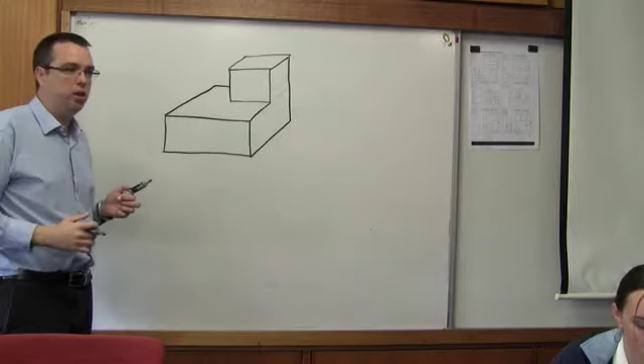Okay. So when you draw with your 0.5 mechanical pencil, make sure that you press down, you hold the pencil pretty well perpendicular to the paper, so that way you're getting the full width of the lead, rather than if you hold it at an angle, you're gonna get a beveled line. Okay, so that's the first one. That one I did pretty quickly. Again, it doesn't need to be perfect because we're freehand sketching. So I'm going to do the second one now.

The second one, remember that the even numbers are supposed to be drawn in isometric. So, what I'm going to start off with in isometric is I always start off with the crow's foot. So that's my crow's foot, that's my 30-30, and I'm looking at, well, where am I going to start? I'm going to start in this corner, that's where I've been told to start. So I have a block that's 20 mil wide, 20 mil high, and it's 40 minus 16, so it's 24 back, right? So it's 20, 20, and 24 back.

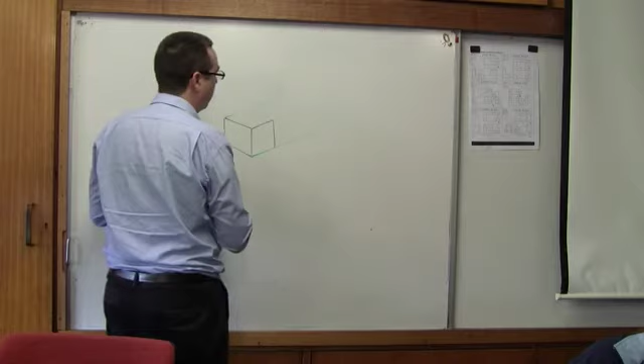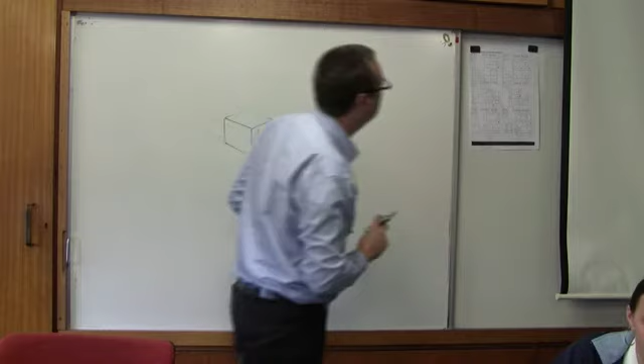Now, this is where you should use construction lines, because there I drew that one too long. Okay, so then I can measure the whole width of this thing is 98. So 98 mil for the whole thing. And once I've measured 98, I could then go back 20. So it gives me this mark here. Does that look about right? Maybe a little bit higher. Is that the top? Okay.

I'm drawing my lines vertically up. Now I'm going to draw, using my set square, a 30 mil line across. I'm measuring 20 mil up here, drawing across, using the set square again here, set square again here, measuring back 24, going across. Well, that looks a little bit bigger this time. I'm going to adjust that just to make sure. This line here, I should be able to draw all the way across. So, that'll do. I'm going to run out of space for this drawing.

I can see 24, and then the rest of the object.

Excuse me, people, I'm recording. Please don't talk.

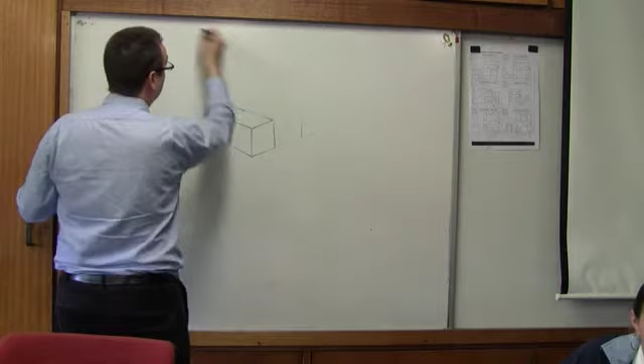I don't want to send people out, but I will.

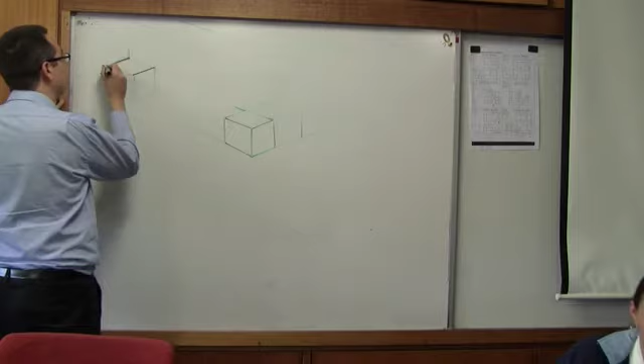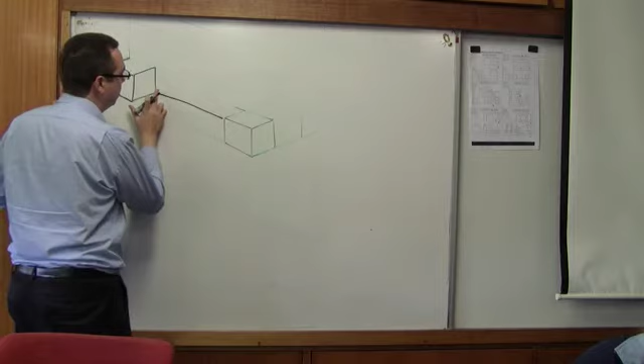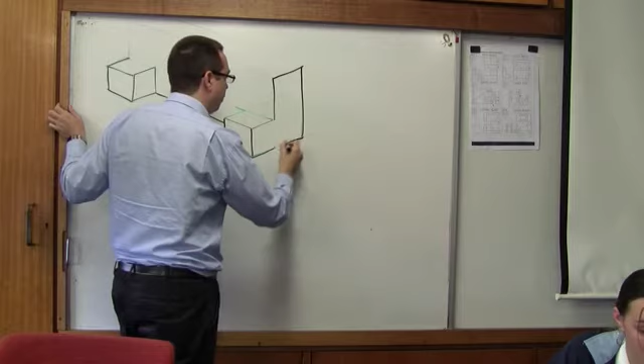Okay, now that I've got my construction lines drawn, I can now start going over this in more detail. That might come because of the height. I think that'll come there. Again, I'm drawing this freehand. You're supposed to be drawing this freehand as well. Now, that line shouldn't be there. I made a mistake with that one. Now, you don't rub out construction lines, but if you make an error with your thick dark lines, you do have to erase those.

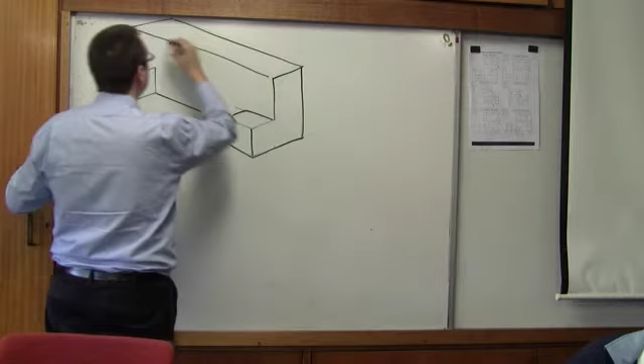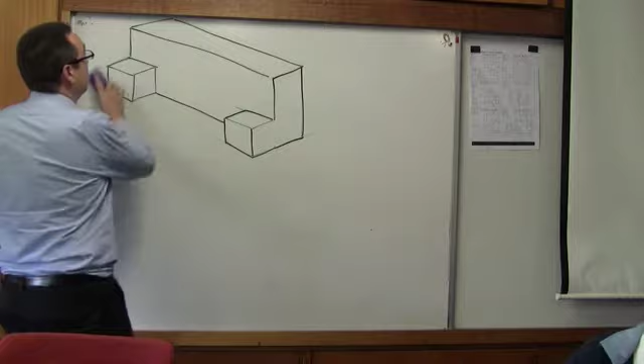Okay, so the second object should look something like that. Something like that. Okay, we're going to go to the third object. The third object is again drawn in oblique, and I can see why I have chosen this one to be oblique, because we've got a very easy front view, and there's not really much else happening that's interesting.

So it's 20. That's 50. And so that's the front view. I've just basically redrawn that front view, and then I just need to draw it back. The width of the object isn't given, but I'm going to say it's 20.

This one is not supposed to be an isometric. No, not that one I'm talking about. Yeah, these are supposed to be in oblique. So oblique's pretty easy to draw. You just go back at 45 degrees. So something like that, and it's hard for me to get this angle right with no freehand. You're allowed to use drawing implements.

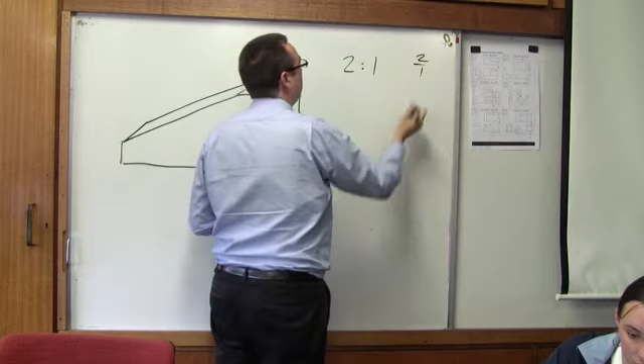So if this was worth 3 marks, which it could be, I'd be looking to see that you got the overall shape and dimensions correct, which is a good place to talk about scale. If the scale says 2:1, that means it should be twice as big, the same as 2/1. If it says 1:2, it means it should be half the size. So based on the dimensions shown on the picture, you should draw your object. If it says 2:1, twice as big. If it says 1:2, it should be half as big.

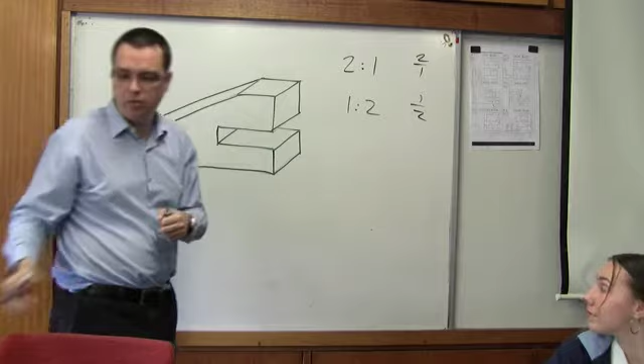So generally, for 3 marks, let's say I drew this shape, right? Let's say I just did that. I'd give that 1 mark. I'd say, well, conceptually you've shown me that it's very, very roughly the right shape, and you at least understand what an oblique drawing is supposed to look like. So you've done that, but you've left out detail, and the quality.

So even if you then included this missing detail, this and this, I'm still only giving that 2. And the reason for that is there's freehand and freehand. Now, I think that freehand's pretty good, right? If I was drawing that for a client, they would know what I was talking about. But it's not even close to being the right dimensions. There hasn't been a legitimate attempt to try and draw this in the right way. So that's what I'm looking at for 3 marks.

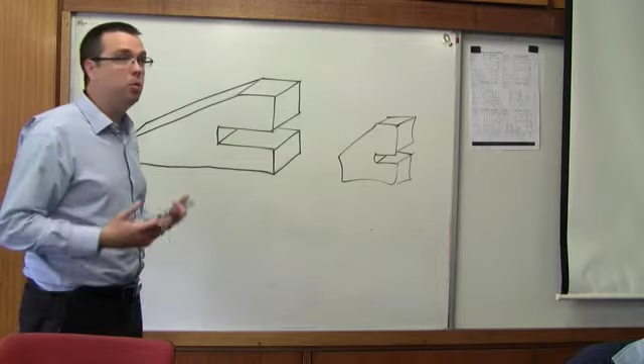It doesn't need to be perfect. The whole idea of freehand means it doesn't need to be perfect, but there's 1 mark for the general shape, 1 mark for knowing the right method of drawing, and then another mark for including details. So leaving those details out would cost you the mark.

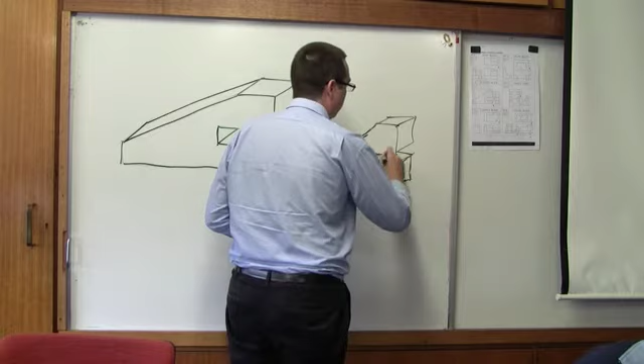I'll also point out that I do not like feathering, right? I just spoke to a student about this today. Don't do this, right? This is called feathering, and it's not acceptable in technical drawing. Don't do that. That is bad. Don't do that. Bad. Don't like that.

Okay. On to drawing number 4. So my front view that I'm looking at. Actually, because we're doing isometric, it doesn't matter. I'm going to start a little bit lower. I got into trouble starting too high earlier, so I'm going to start a little bit lower down here. So I've got my crow's foot, and I'm drawing something that's 80 and 15 up. So, yeah, I guess we'll call that 15.

Call that 80. 15. So it goes in 5. In 5. We go across another 15. We're going up. Does it show the height of those objects? No. Because I don't have the height of the object, I'm just going to draw it. I'm going to measure off the drawing, assume the drawing that I've provided is to scale. Take a reasonable assumption. Again, we're doing this freehand, so it doesn't really matter.

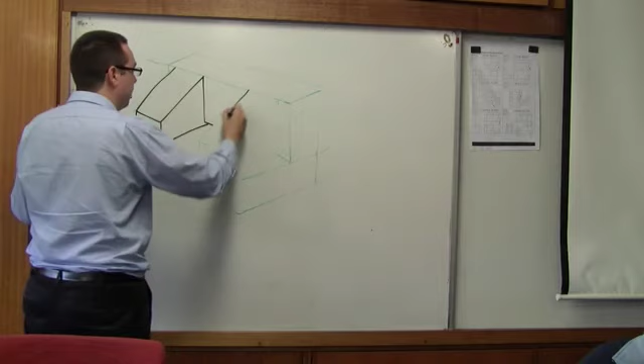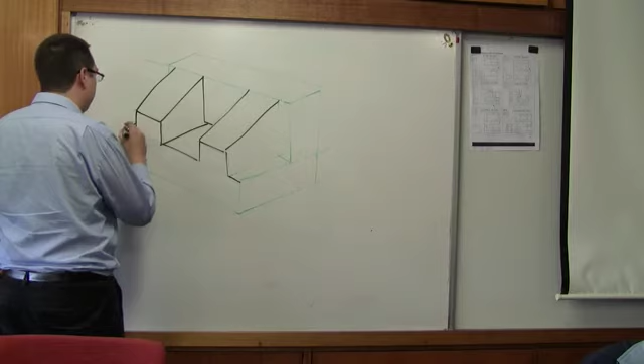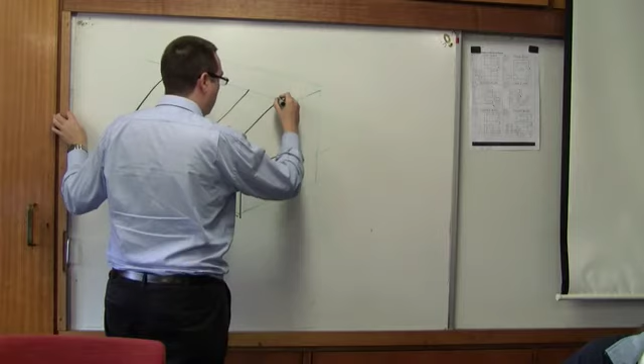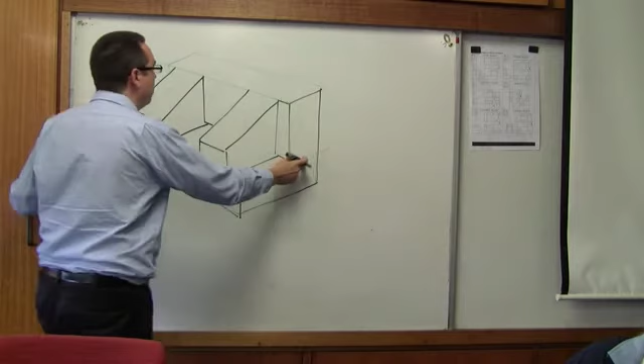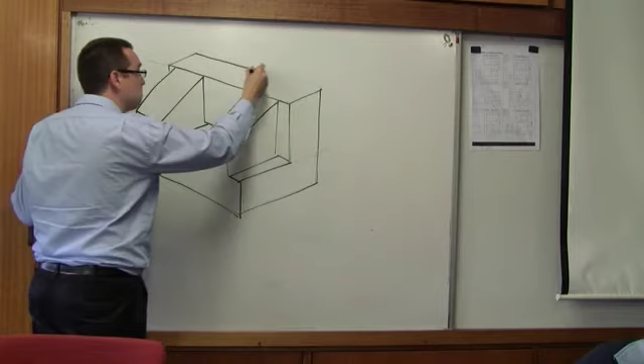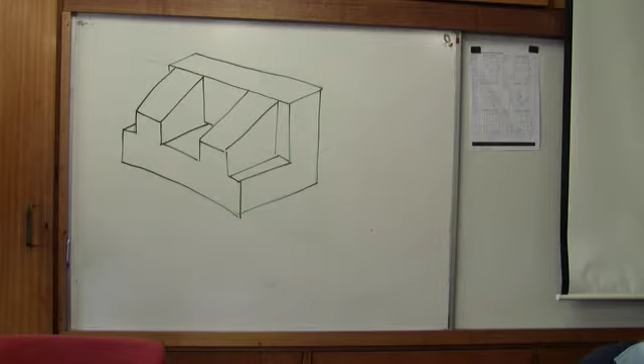That's it. Now you'll notice there that I'm not erasing that line. That line can stay because it's a construction line. And now there's a bit of a curve in this line here. I'm not concerned about that, right? If we're talking about freehand drawings, which is what we're doing here, I can accept that line. What I'm looking at is the general shape is correct. The dimensions are generally correct, it's proportionally correct, as long as it's roughly to the right scale.

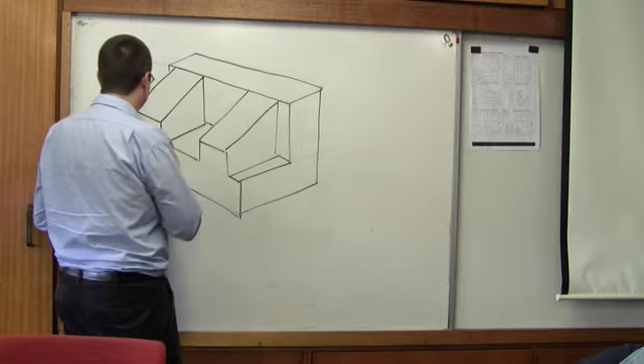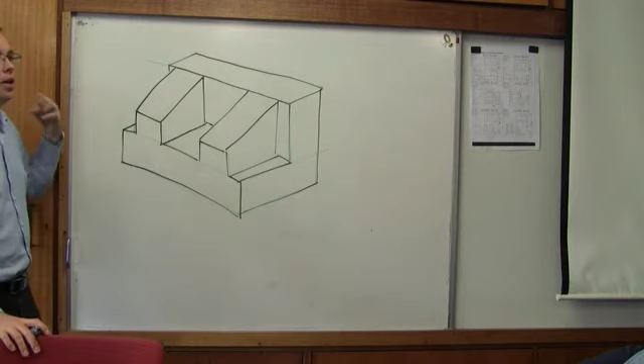I'm drawing at an enormous scale because I'm drawing on a whiteboard, doesn't matter. My angles are mostly correct. Even if they're not perfect, at least I can tell looking at this that it's an isometric drawing. And then I'm looking for things like, have I forgotten this detail? This detail here is where people would commonly make mistakes. Making sure that this line here is not dark, but these lines are dark. That can be conceptually difficult to evaluate, but the idea is here there's no bend, whereas here there's a bend. So there is a bend where you would see a line.

Okay, we'll move on to question 5. So the first thing I'm looking at is what does the front of my object look like? This is actually interesting because the picture is cut off, it's quite difficult to figure out exactly what's going on here. From that side, there's a line here, which I'm not sure what's going on there. It looks like it's coming out at 90 degrees, so I'm almost concerned there's a line that shouldn't be there. Maybe the width of that whole object is not 50, so that's what I'm going to assume.

Okay, so I'm going to start off by drawing this first rectangle. This rectangle is 50, 56, we'll call it 60, we'll call it 70. It is hard to draw this because there's some dimensions missing, but we're going to call it 70 by 12. And I'll continue this line going, no, I don't need that one. Once I've got 70 by 12, I'm going to say that we're going to go back 10 millimeters.

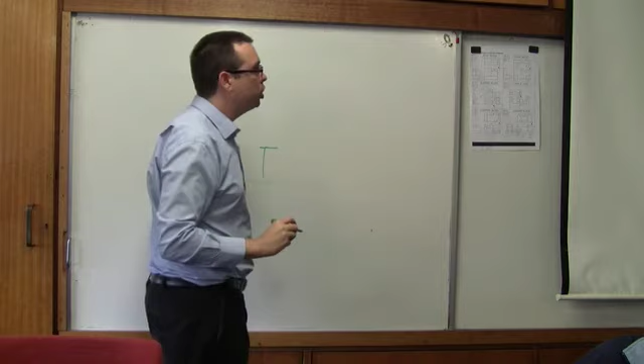Notice I can definitely see that object goes all the way out. That is really tough. There's no line here, but there's a line there. So we're going to say that that line should not have been there, that line down the bottom. I might modify that for future homework people, so if you're wondering what line he's talking about. That's 15. Okay, we're going to go back at 45 degrees. And then

So for this object here, we're told it's 20 by 20. So it's here and here. That's where that cut is. And then how far back is it from that cut? It's a 20 and then another 10. And how tall is this object? This object here is 18.

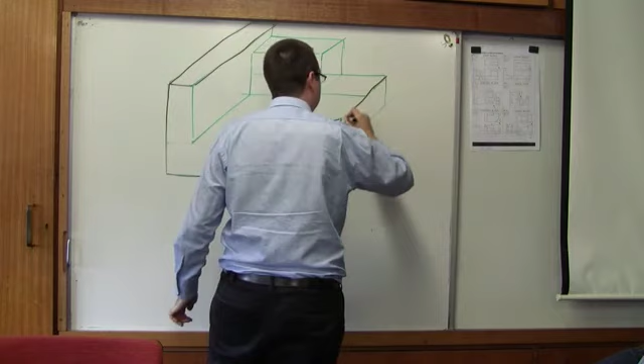Mr. Button, please stop talking. Stop talking. Second time I'm asking you, Mr. Button.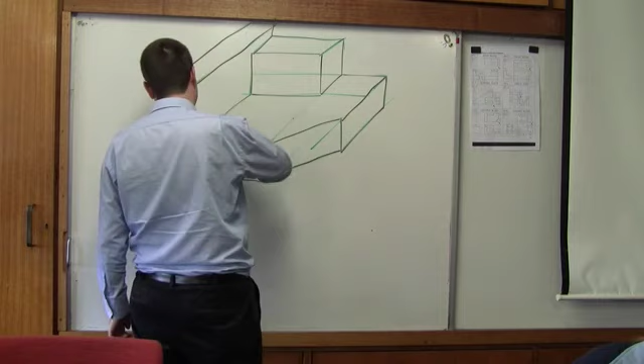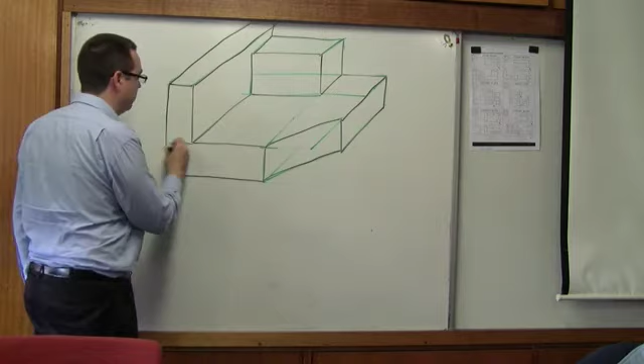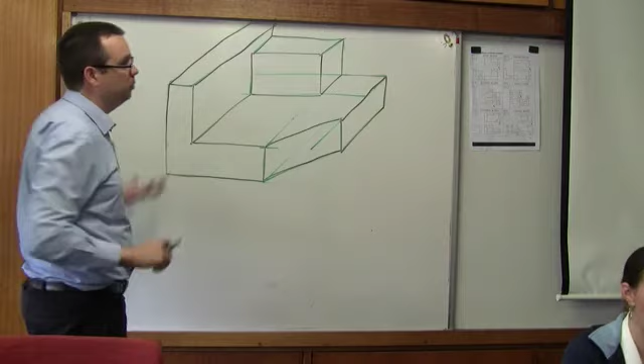Now, the difference between my drawing and what's shown, I can't figure out why this line is here on our original drawing. Because the side view is cropped, I can't figure out what's going on there. So because I can't figure out what's going on there, I'm just going to have to say that I'm removing it. Right.

Continuing on with question 6. So this question, I needed to restart it because it wouldn't fit on my board. So it's the base of this. What we're going to draw is the base first, and the base is 90 by 52. So I want to make sure that I can fit 90 by 52. So I'm going to draw this at half the size I've been drawing everything else. And I know it's a little bit lopsided, so I'm going to go a little bit deeper on this side.

Now, I'm obviously not drawing these with a set square, but I can look at that angle and say that angle's a bit too steep. So I'm going to draw that again. A bit wonky. Going to take another crack at it. Again, you are allowed to use set squares. So even where I say it's freehand, you are allowed to use set squares to help you get your angles.

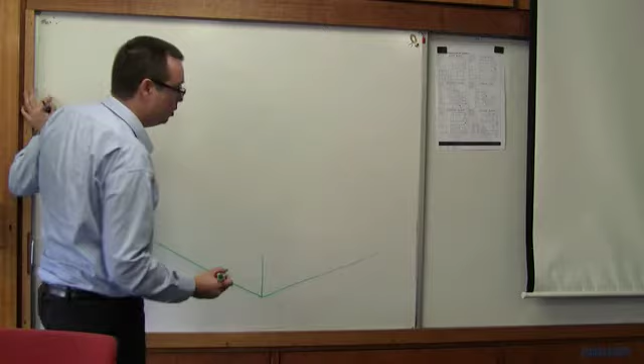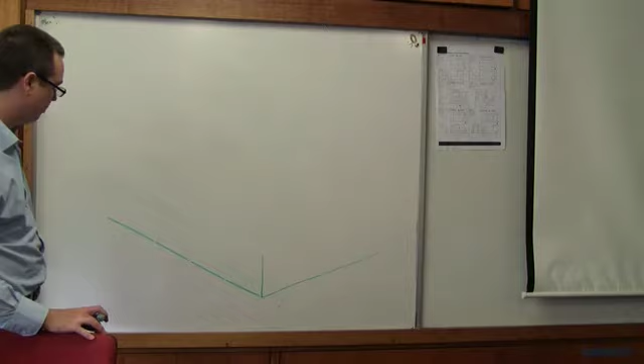Now, there is a name for isometric drawings that are drawn at 45 degrees instead of 30 degrees. They're called axonometric, and they are used by architects. Architects use axonometric. Let's see how my scale is going to be. I just don't think I can fit. Can I fit number 2 on here? 30. Yeah, okay. Looks like I can maybe just make it fit.

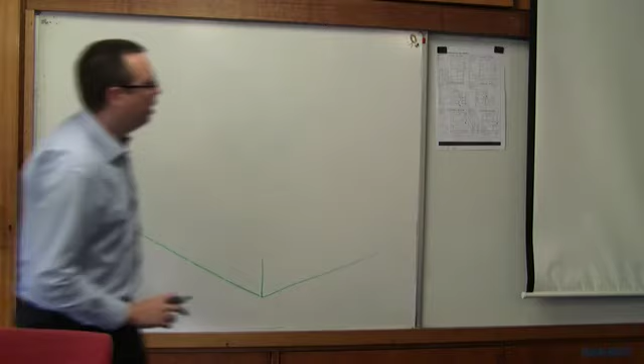And on 52. Okay, I am doing it my regular scale, but I'm going to just make it fit. The height of this base is 12 millimeters. So I've got that about right. Okay. And if I was keen, I could even draw that now. That looks okay. I can live with that. Okay, that'll do.

Now, I then have to take the chamfer off. The chamfer, we're told, is 10. So we're taking 10 off each of these. And so I'm measuring 10 and then just drawing those lines. And so those lines should be horizontal or vertical lines. And then, in from that base, how far? We're 6 mil in from the base, and we're drawing viewed from that direction. So 6 mil off the base, and then how far from that edge?

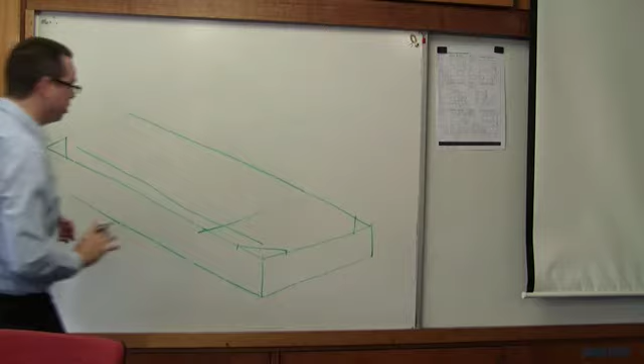22. Okay, so this is 10. I've got somewhere like there. That's where this base is coming through, and this is at 6. Bit wonky, but it's a construction line, so it doesn't matter. Then, how wide is this object that's sticking out? It's 40 by, they don't really give us a great deal of details. I have to add it up.

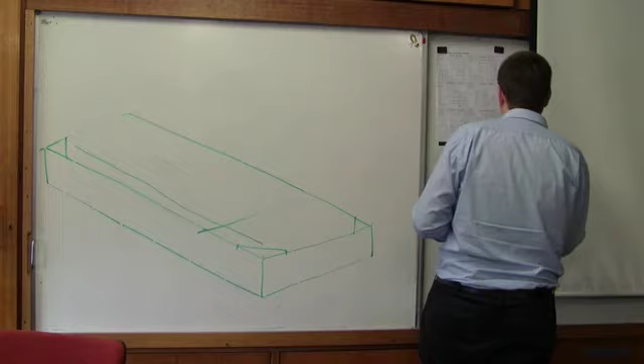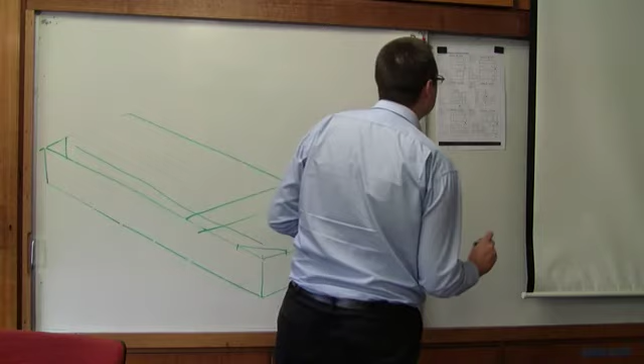It's an internal object, what's going on there? Looks like there's an opening, there's an actual hole inside here. Okay, so we've got a base, another 8 mil. And then we have 38. We're 6 mil from the edge, but how wide are the walls? The walls are 8. Yeah, that's okay. These walls are 8.

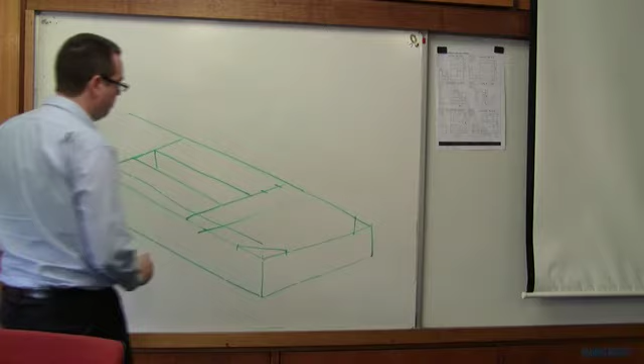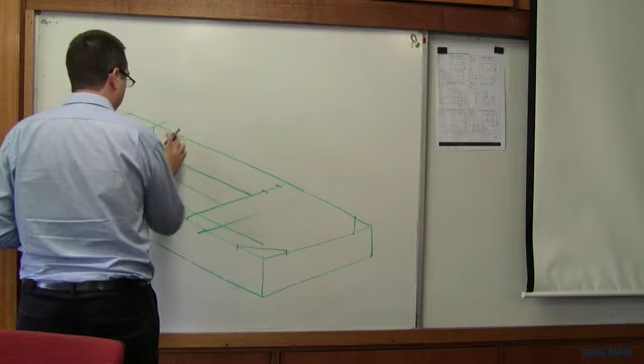So this is the hole in the middle. This object here is the hole in the middle. So there'll be a line there. I don't know how much of that we'll be able to see, but we'll be able to see some of it. We're going to go up 10 for these walls. We don't typically need to erase construction lines. If you make a mistake, I guess you can. This line's going to be a lot taller than that, but this is internal.

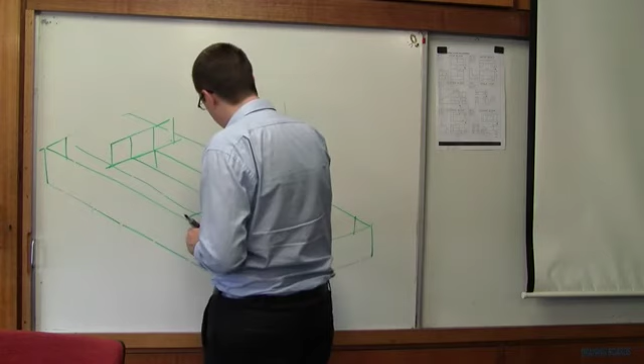Now, how tall is that bit? It's 40 less 12, so 8 gets us to 20, so it's going to be 28 tall. We'll see that here. Now again, I don't really need to remove that construction line, but I am going to, just to make things a little bit easier to see what's going on.

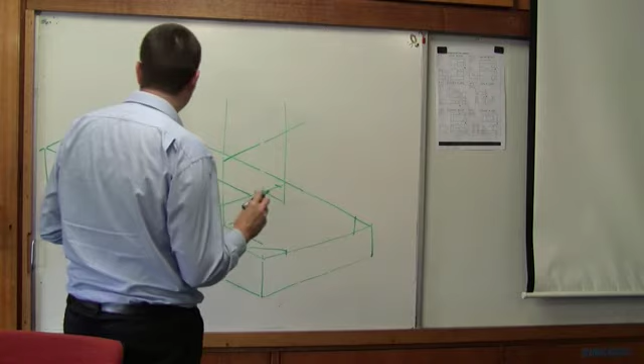Now, okay, to draw this, this is tough. To draw the 45-degree line, I'm going to draw across 10, and then I'm going to go up 10, and that will give me my 45-degree line. So that gives me a 45-degree line. From there, I can draw across until I hit my 45-degree line, and that will tell me how wide this thing needs to be. Again, that's pretty tricky, and you can see now I'm starting to get a fairly complicated board.

At this point, it looks like that hole in the middle is totally unseen. I'm hesitant to start putting construction lines, but I would consider at this point saying, well, I know this shape is finalised. Again, this is fairly complicated; this is the sort of thing that I would put maybe at the end of year 11 as a preliminary question.

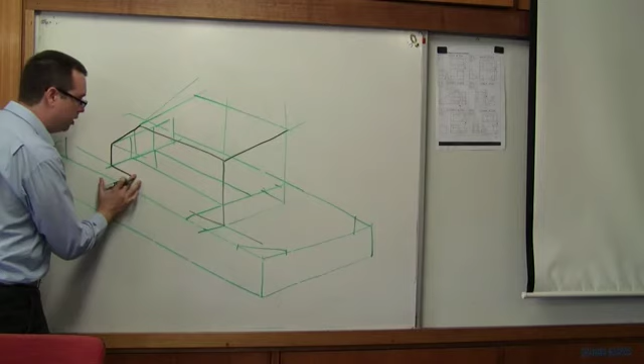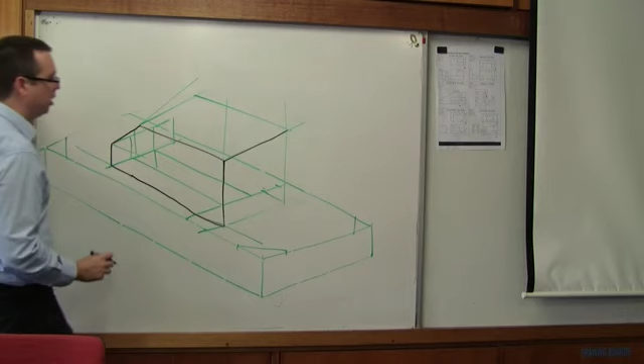It's worth mentioning that pictorial drawings, including isometric drawings, weren't in the paper for a long time, like more than 5 years. There were no pictorial drawings, and I started to wonder if I should even be wasting time teaching them, to be honest. But then, in 2020, out of nowhere there was an isometric drawing question. My class actually did relatively well on it because they just took a punt. None of my students were expecting one, but there it was, and they just took a guess at it.

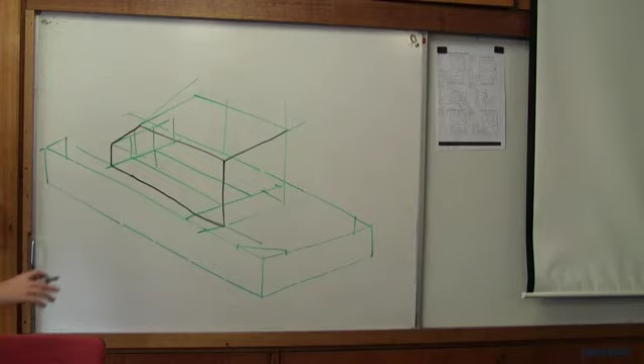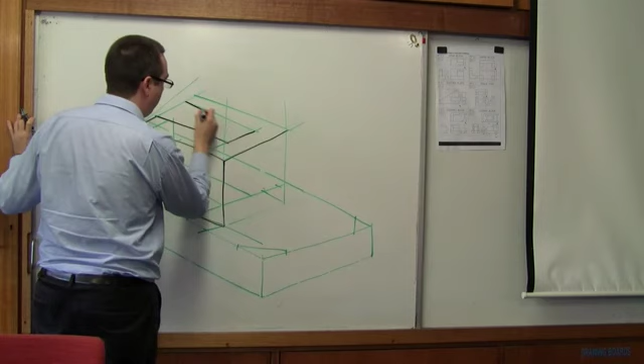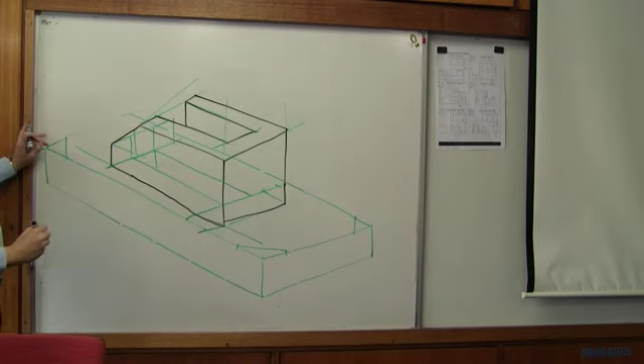So the thing I have to do now is draw this 8mm wall all the way around. How big is 8mm? It's about that big. Okay, so this object in the middle is almost done. It turns out we didn't need to find this hole here at all, so that can save you some time. I'm going to remove part of this line just to make it easier to see on the video.

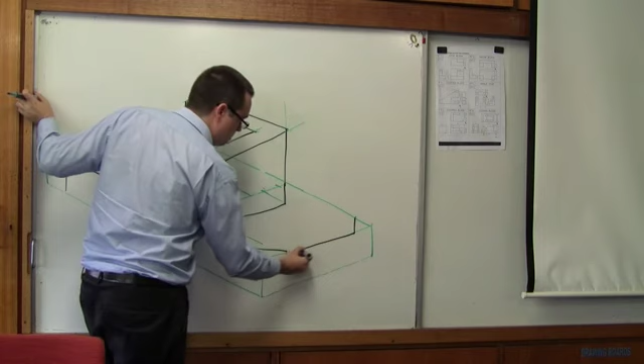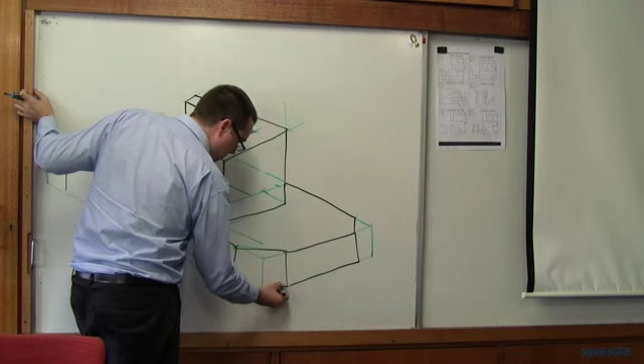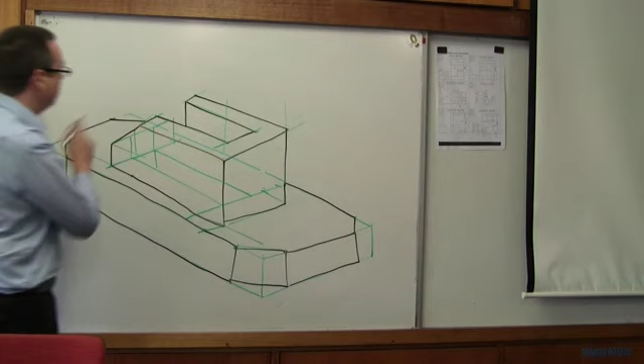Now I'm going to show the chamfers and the base, mark that out. That line drops down, we can't see anything past that, but we can see a line here. I'm a little bit too lazy to calculate that one at the back, so I've just drawn it as a line. I looked at how big this one needed to be and used that as my guide, but it is important that you do give it some consideration.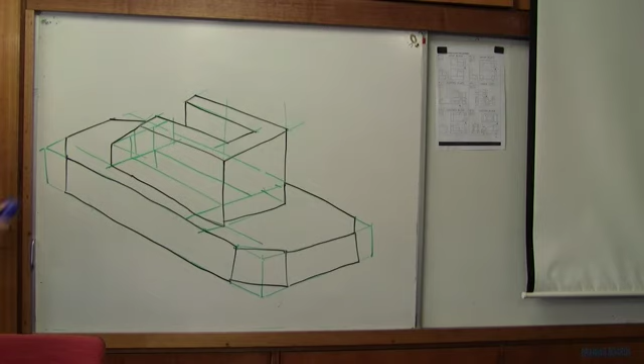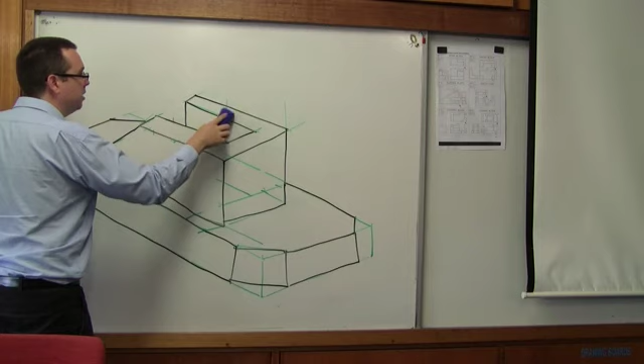Now, that's pretty busy, and that's what yours will look like too. When you're drawing all these construction lines, you'll have to sort of squint to see your object. I said that we don't remove construction lines, but just in this case, to give us an idea of the overall shape, I'm going to remove some of the easier construction lines, to help you conceptualize what you need to draw.

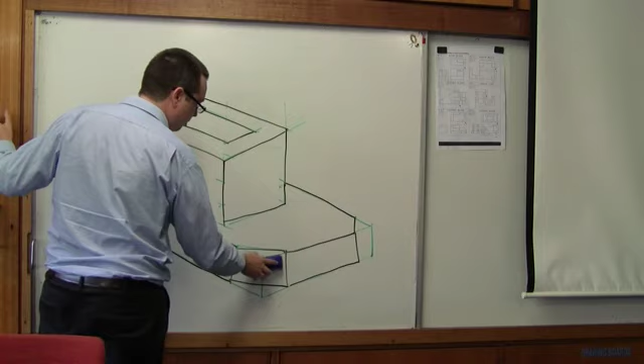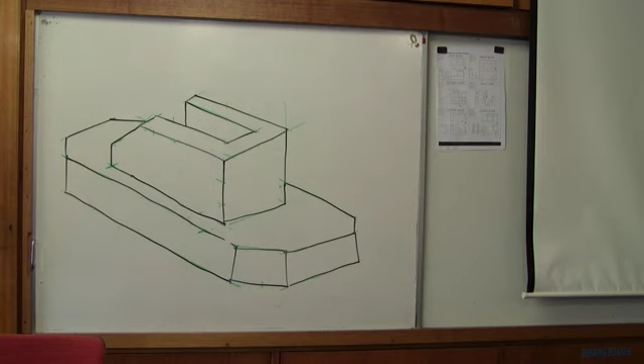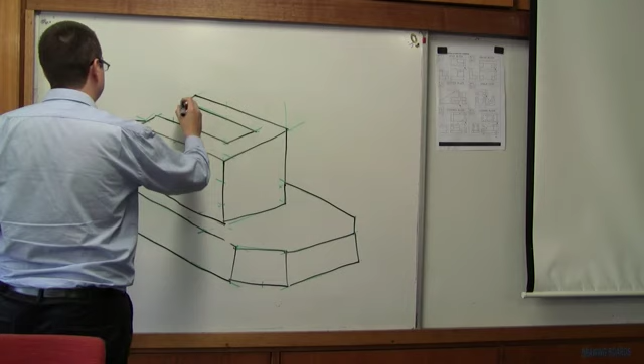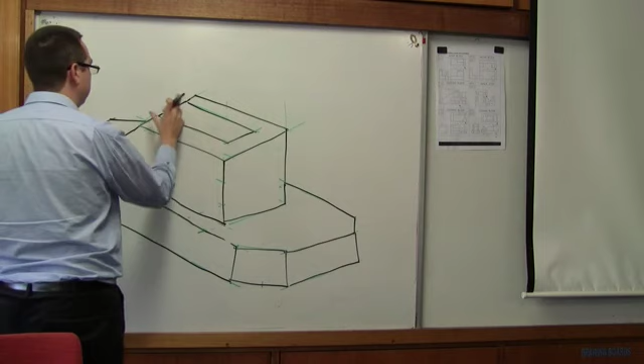Like I said, this is a hard question, way harder than I'm going to give in the first assessment task. It's right up with the difficulty I might give at the end of the year. There we go, the object should look something like that. I'm particularly looking for this because I'm using this as a resource. Something's wrong there. That line should not be there; I think it drops away into the distance, given the length of that line. So that's what it'll look like.

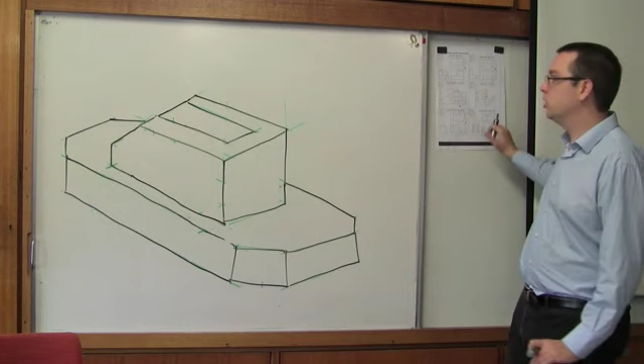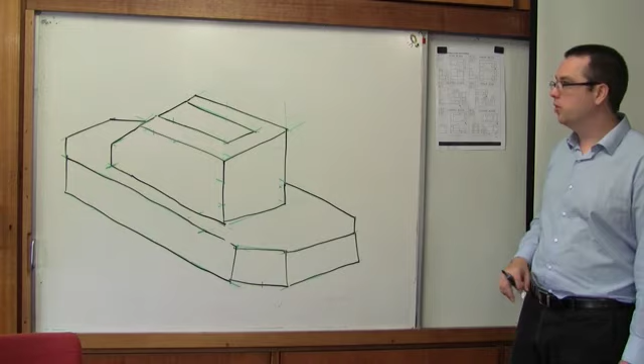Just trying to see if there's any lines I've forgotten. Can anyone spot any? We can't see the base in the bottom, which is what that hidden detail circle is showing. I think that's right. It probably would have been a more interesting drawing if it was viewed from the bottom left. I made it viewed from the bottom right, so we can't see the opening that we otherwise might. Still useful nevertheless. I might even add another version with another viewpoint, because I might change homework next year. But that'll do.